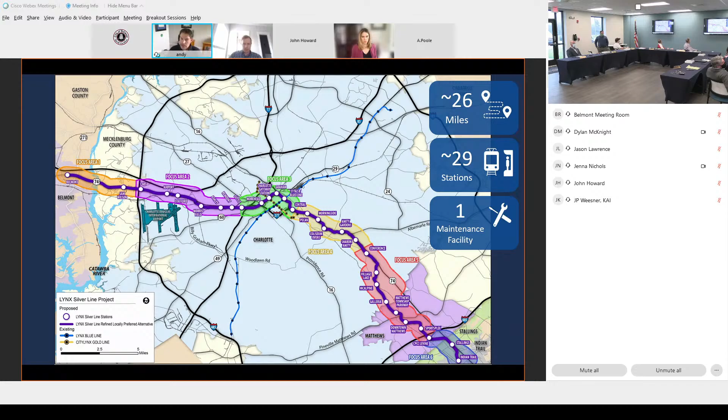We have 29 stations and 1 maintenance facility needed to operate the system. Focus Area 1 spans from the city of Belmont down to I-485 near the airport. From there it continues along Wilkinson Boulevard the whole way to Morris Field, then deviates and follows the Norfolk Southern Railroad from Morris Field into Center City, goes around the northern side of Center City, then out Independence Boulevard to the Village Lake area, where it transitions from Independence over to Monroe Road, into the town of Matthews, across I-485, and then into Stallings and Indian Trail. That's the high-level view of the preliminary staff recommendation we're putting forward.

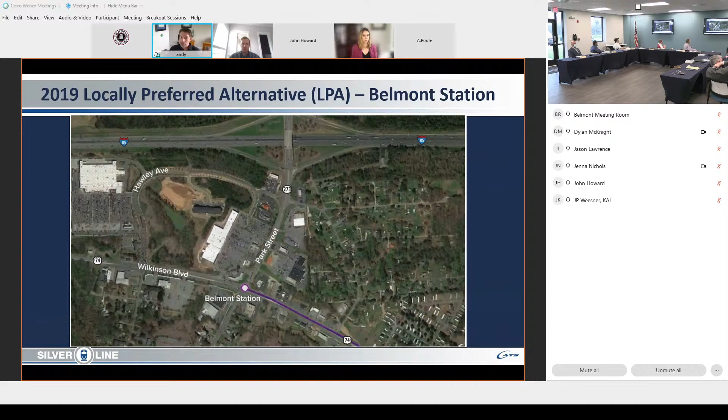The next couple slides will get into a little more detail, focusing on the Belmont area. As a starting place, I wanted to show where we started from. When we started this process a little over a year ago, the locally preferred alternative, adopted in 2019 through the system plan update, had a station in Belmont, but at Park Street. That was an issue of needing more time to coordinate with the town and with Belmont Abbey, and having a solid understanding of some improvements around Park Street. When we started this project, we wanted to evaluate different ways to activate the station and create better opportunities for transit-oriented development around it. This was the starting place when we began coordination with the towns and local stakeholders.

What you see now is a map of our preliminary staff recommendation, sent out through a hard copy mailer to anyone within a half mile of the light rail alignment. It shows the purple line extending beyond Park with a station near Hawley Avenue, in coordination with Belmont Abbey and the town through our early coordination with stakeholders. We felt there were real opportunities for great development in that location, and looked at better ways to connect the station to the surrounding area.

This map, just to explain what it shows: the purple line is our refined locally preferred alternative. The gray lines you see here and there are alignments we evaluated but are not putting forward at this time. If you see a yellow triangle with an exclamation mark, that shows a change in the LPA that was adopted in 2019, and these boxes describe that change.

So to describe, we moved the station from Park Street up to Hawley Avenue, really because the development benefits seen at the Hawley Avenue station won the day in our evaluation of benefits and risks, as well as having better connections to the station since you're situated right between Main and Park Street.

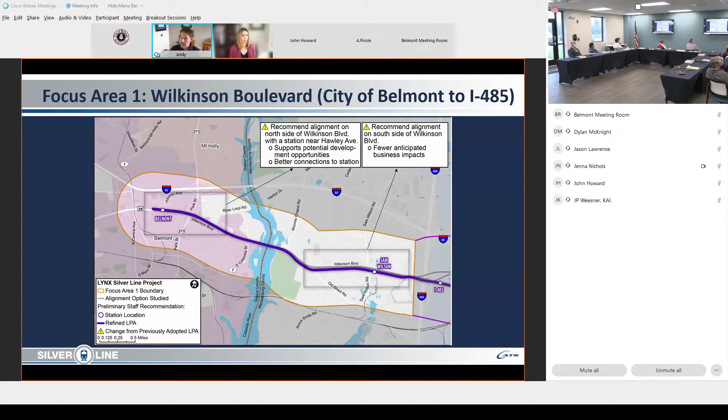After the bridge, we go up and over Wilkinson Boulevard and traverse along the southern side, primarily because there are a lot of industrial businesses on the northern side with major driveways that we had concerns about crossing with the light rail at this point. So we bridged over to the southern side with a station at Sam Wilson up to I-485, then transition back to the northern side. There will be quite a few bridges going over Wilkinson Boulevard back and forth to minimize impacts as much as possible.

Let's take a moment - I have some slides with more details and aerial photography, but just to talk about our preliminary public input. This is what we've received as of March 5th.

We spent a good bit of energy on outreach, having mailers in both English and Spanish, yard signs, hard copy mailers, and of course a lot of social media and PIO outreach to all the communities, as well as dropping information off at public areas. We also did recordings available on YouTube of all the public meetings - we had six public meetings all available via YouTube with live Q&A.

One of the big focuses was to really come up with a better survey, a better way to reach out to people so they could provide us input. As of the closing of the survey on March 11th, we've had about 2,000 survey participants, which is much, much more than we had in our second round. That was a real success.

We had 110 virtual public meeting attendees in Focus Area 1 - probably one of the highest amounts of attendees really weighing in, a lot of great interest from the Belmont and Gaston County area about getting access to those public meetings so they can have some input.

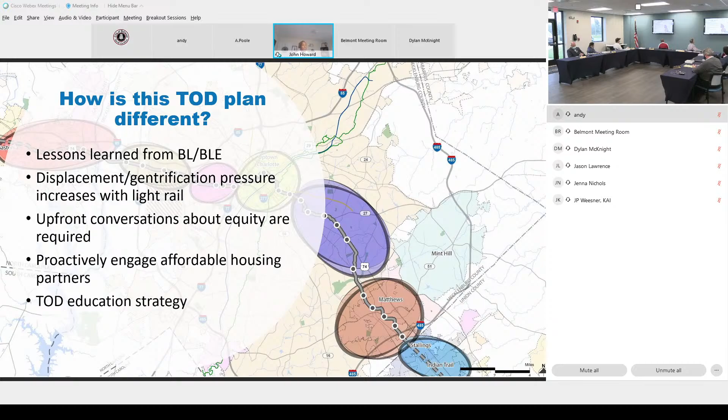And the team's grown a little bit. All the city departments in the city of Charlotte, of course, our friends Gaston County, and also the towns of Matthews, Stallings, and Indian Trail, and also Mecklenburg County Park and Recreation.

It's not just about development, but also about open space and parks around the stations are important as well. So some of the questions we're asking ourselves is, one, what kind of place do we want this to be? Normally, really good stations have a lot of diversity in terms of land uses and different types of station areas, so we'll talk about that.

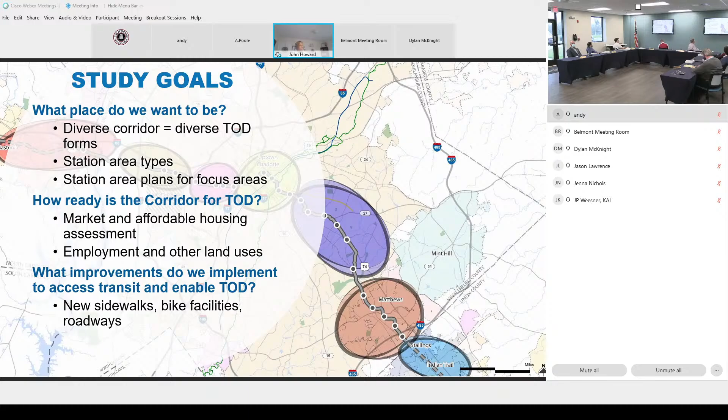And again, how ready is the corridor for TOD? So we'll have a market and affordable housing assessment as part of the plan. And also, what capital improvements are going to take place as far as sidewalks, streets, other important roadways and connections, making sure that our stations are well connected.

So again, success is more than just designing for the train, getting from point A to point B. We also need to look at mobility, make sure we have safe places for people to walk and bike, look at land uses that are around the station, make sure that we can support that through ridership.

And again, a nice diversity of uses. Community design, which is very important to us in the city of Charlotte, work with you all as far as what your vision is for community character, and also equity, as I mentioned before.

So we also want to make sure that we enhance connectivity and we build in the right systems for walking and for driving and biking to the stations and around the stations, as well as encouraging transit-oriented development. That is a complementary use of land uses.

Not all stations are going to be the same, though. If you look at the Blue Line and BLE, each one has its own character. So we'll talk about that with the project team and the citizens of Belmont.

And also enhance community identity. Again, looking at your previous plans and your work, and look at how you want to have your city highlighted in the plan. Because it's not Charlotte. We have our own process here, but also want to respect the planning efforts that you all have done in the past.

And again, expanding opportunities. That's getting folks to and from places of employment, education opportunities, and also having a very healthy, equitable place to live. But it's more than affordable housing. We talk a lot about that, but it's also about retaining businesses and building for small business and large businesses.

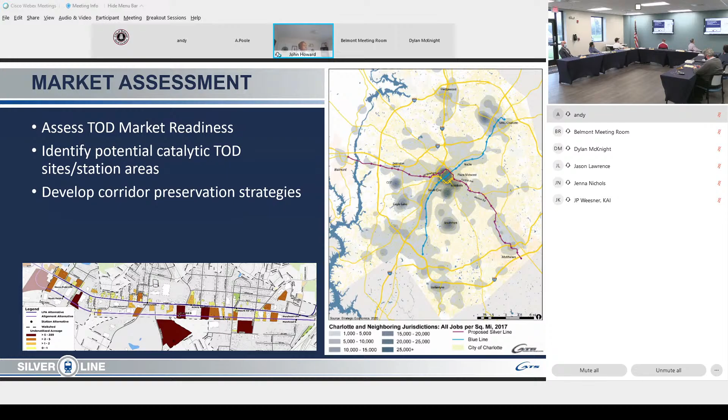That is protecting the corridor width, if you will, for the train.

So part of our work also looking at station location and alignments. We're helping the design team with that, looking at station concepts, what do we want to not just redevelop, but also what do we want to protect and preserve. And then we'll do a demonstration station area plan for the area right around Park Street, and also have a station area typology manual that'll all be part of the planning effort.

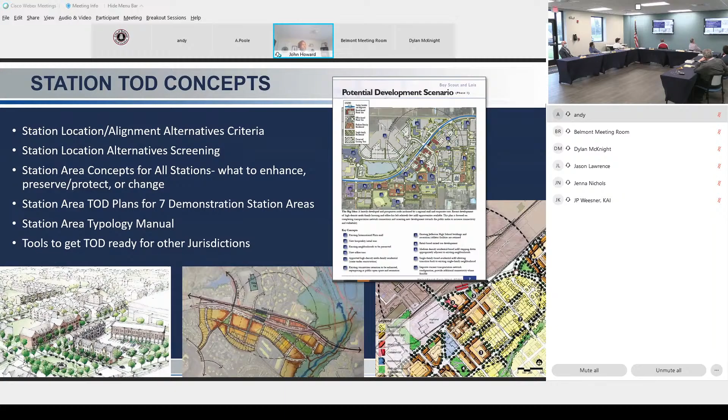And also tools to get TOD ready for your jurisdiction. So we've done some interviews with the City of Belmont staff and Gastonia staff about the zoning regulations that they have now, and how we can get those ready for the next chapter of TOD development and construction.

So again, part of this too is looking at an affordable housing assessment and talking about how we can retain property around the station areas for housing. I know we have our own housing services department in Charlotte, but also want to talk with you all about how you can look at this moving forward for your jurisdiction.

We'll outline capital improvements again, that's streets, connections, parks and open spaces, to make sure we build out a really well-connected station area around the stations. Part of this too is looking at potential joint use development strategies, where we could partner with private business to leverage possibilities for affordable housing.

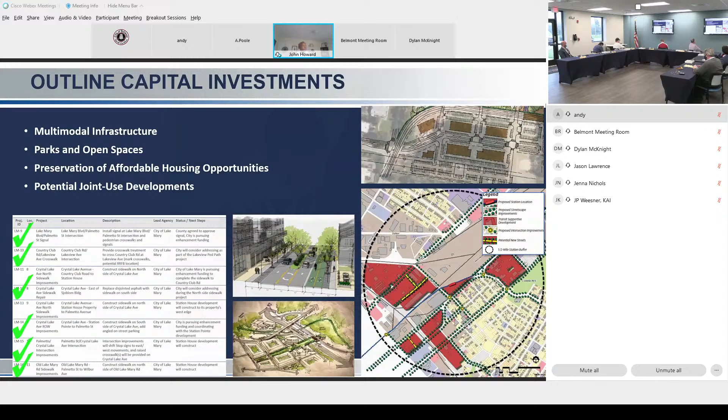We're going to touch on many different projects going on now. The city's undergoing their 2040 comprehensive plan. We already talked about working with the Silverline design team and the rail trail, but also talking with Connect Beyond, the regional transit plan, meeting with those folks about TOD and getting transit-ready for the corridor itself.

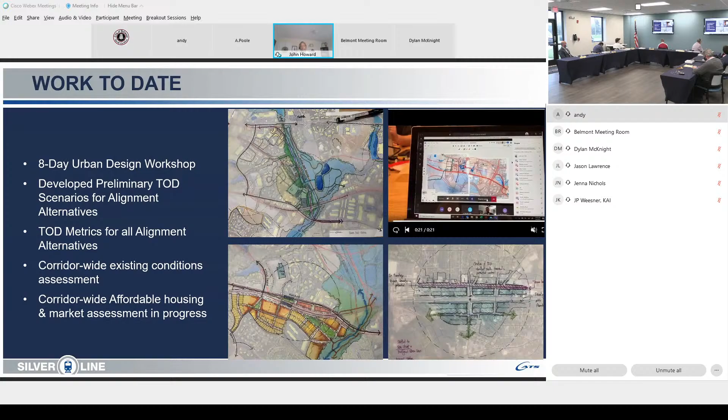Some of our key findings, which I mentioned already: the corridor has a variety of characters and opportunities. There's a strong desire for equity, affordable housing, and mixed income housing, and strong support for a bike-ped trail. TOD here would be different than what's happening in South End Charlotte, or even the Blue Line extension around North Davidson Street. It'll probably look a lot different than that in Belmont, and we understand we have a lot of infrastructure challenges along the corridor, and hopefully we can get investment that creates really good mixed-use developments along the corridor.

We're also looking at other planning efforts, like the Better Boulevard previous study you all worked on a few years ago, and the City of Belmont's transit and transportation plan. We're working with partners like Belmont Abbey and others to look at what community character means to you all, and how to preserve what's important for you.

These are some snippets from the existing conditions report. We talked about the different alignment options, starting with the LPA, and winding up where we are now, shown in the red box, just across Park Street on the western side.

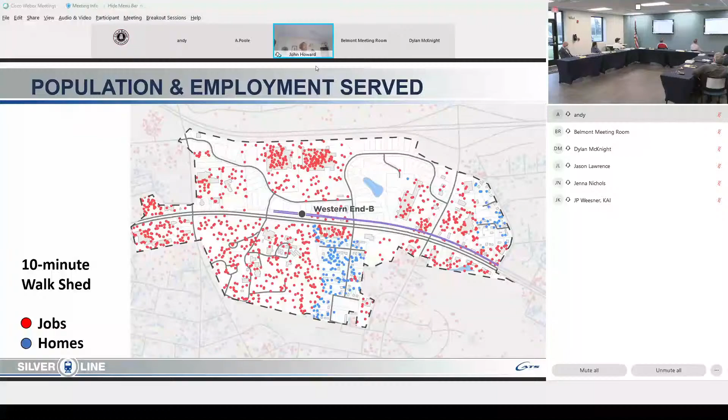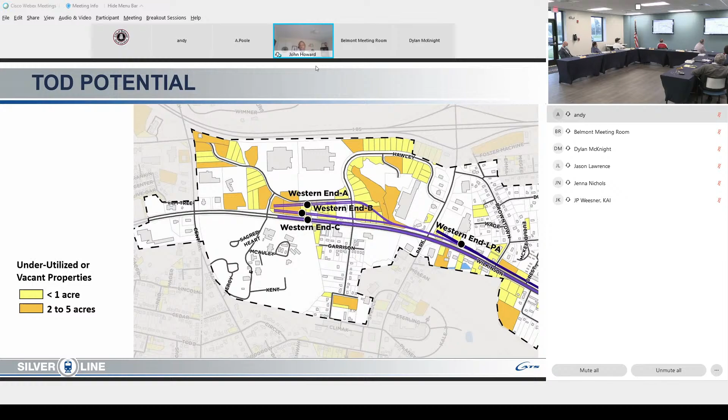We're also looking at currently vacant or underutilized properties. There are quite a few around here, so that's a good thing for us to rethink how we could re-envision the area around the station.

At a very high level, just looking at what that could look like. Very conceptual, nothing is finalized or decided, but we're looking at what a well-connected station area could look like, general urban forms, infrastructure needs, local connections, and where those are going to be most important to make this a very successful station.

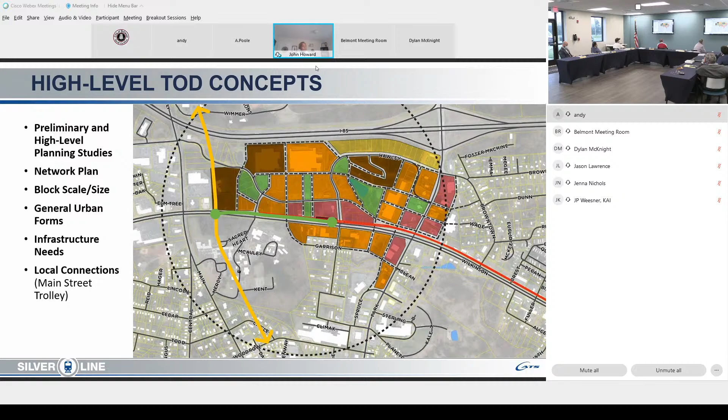Nothing's been determined yet, but here's an example of a cross section that could look like Wilkinson Boulevard if you're side-running, with planted medians, pedestrian zones, and six travel lanes, with building frontages right behind the sidewalks. It's a very urban type environment.

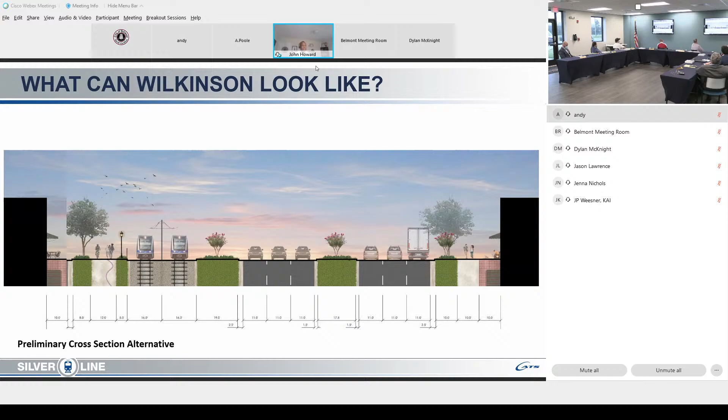Doing pretty good for a while there. Now my PowerPoint is taking a break again, so bear with me for one second.

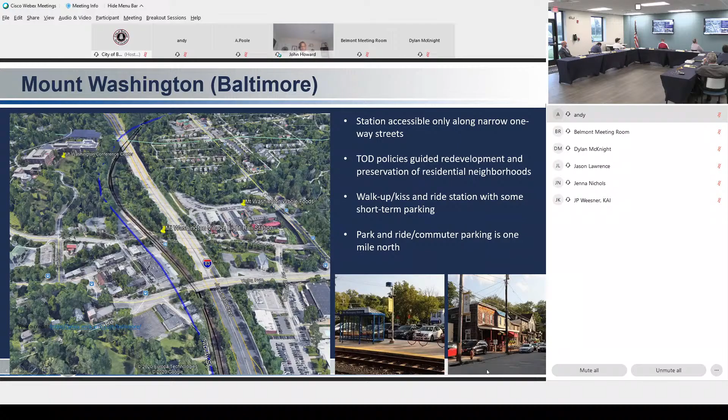So again, they're seeing kind of what you're seeing too in Belmont, the reuse of older buildings that are being retrofitted for new uses. Just looking at how it can repurpose older, maybe even out-of-date buildings to make them more modern.